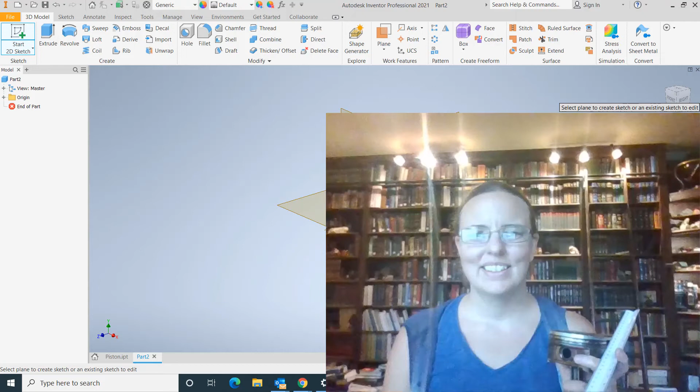Hello! So exciting, we are now starting our engine project. And the very generous people at Kingwood High School have donated some parts for us.

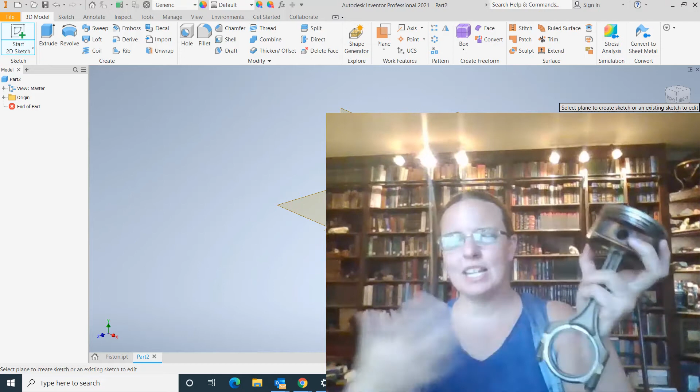So what I have here is the connecting rod, wrist pin, and piston off of an Acura. Now, interesting thing, if you think of Acura you might first think Japan. But upon measuring the dimensions of this thing, it lines up with, surprise, inches better than millimeters, which means it's actually made in North America. And I Googled it, and sure enough, Acura is now produced in Ohio.

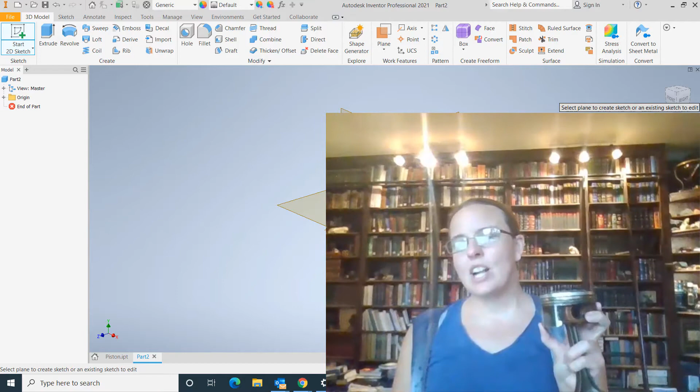We're going to start out with a piston. It looks like a cylinder with some stuff carved out of it. There's actually a little bit more to this than meets the eye. We will talk about the oil control ring, the compression rings, how those valves are going to sit on top of it, the skirt, and how it's going to rub against the walls.

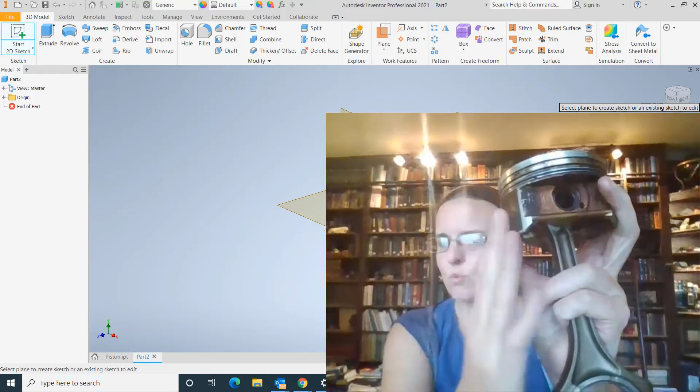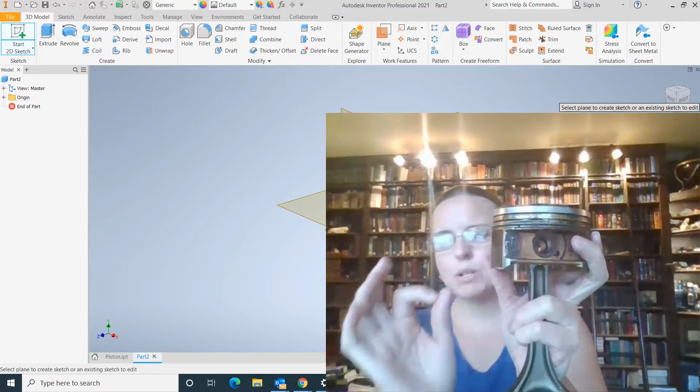This is actually not a straight cylinder. All of the combustion happens at the top, which means the top is really hot and will expand versus the base, which is not quite as hot and does not expand enough. So you have to put in some material thermal properties in determining the dimensions of this thing. It's going to be using a tapered extrude for that point. And hopefully this will be kind of an interesting introduction to engines and how engines work. I'm super excited to have some actual parts to take dimensions off of this year.

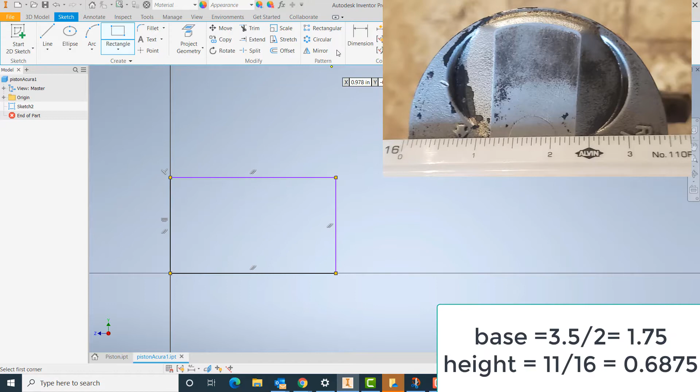Zooming in on this, we have a diameter of 3.5 inches, or radius of 1.75. I'm actually going to just make a quarter of this and revolve it around the center. So we'll have a rectangle 1.75 and a height of 11/16.

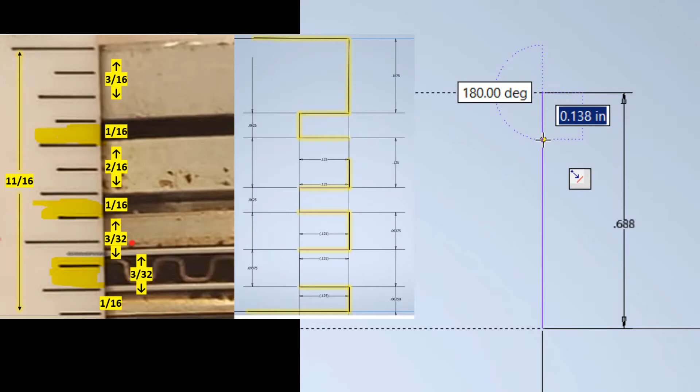And you can actually put these things in as a fraction, those three significant figures showing up. The fourth significant figure, it's 11/16 high. 3 divided by 16th for this top lid, going back 1/8 of an inch.

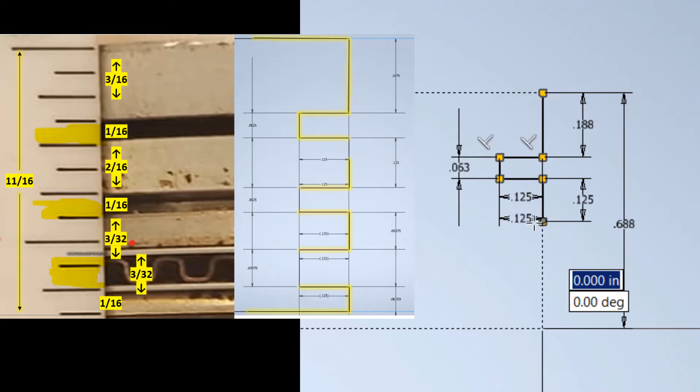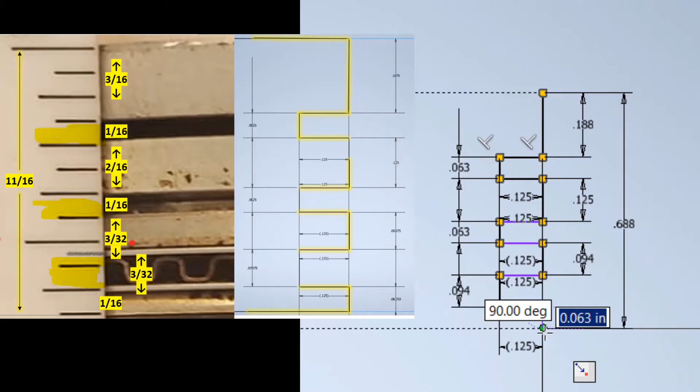0.125 inches. And then we're going to come down 1 divided by 16, back over 1/8, 0.125, down 2 divided by 16, over 1/8, down 1 divided by 16, over 1/8, down 3/32, or 1.5 over 16, over 1/8, and down another 3/32, or 1.5 over 16, over 1/8, and that should bring us 1 divided by 16 back to our base.

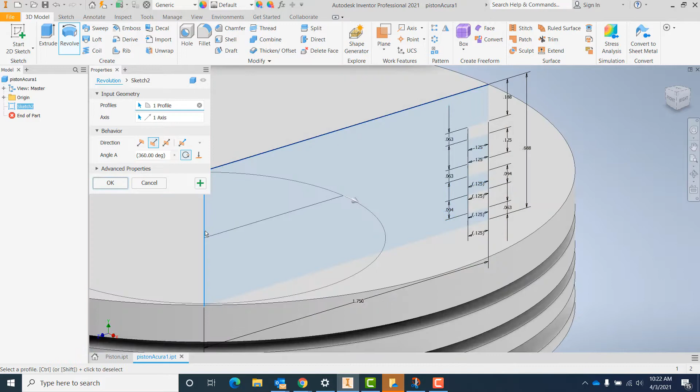So completing this top portion, turning these back into regular lines, finish sketch, and we're going to use the revolve command. Select our area, and the axis is this left side of the rectangle, 360 degree revolution, and there you have the top.

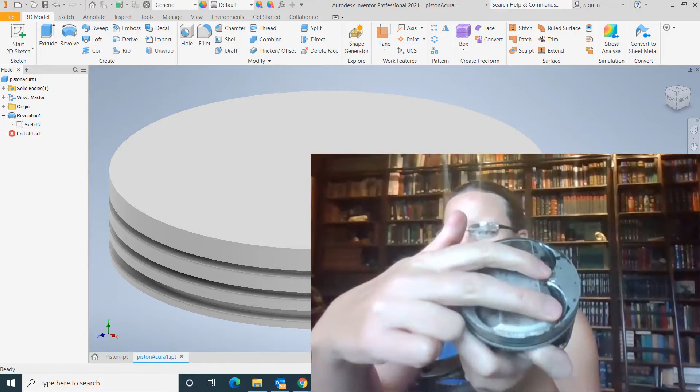Just a few notes about the crown of this thing. So the combustion area happens right above the piston, and in here you can see the valve recesses. So we've got the intake valve where the air and sometimes fuel is sucked in. Sometimes the fuel goes directly to the combustion chamber. And then there's another 2 valves where the exhaust is then pushed out after the combustion happens.

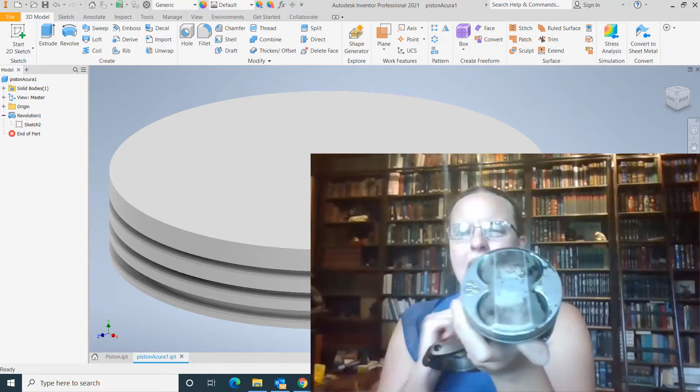Some interesting carbon buildup on this that indicates that there was a little bit of oil leaking out of those valves that then burnt on the top of this. You can check your seals and some of the engine performance by looking at carbon buildup in here.

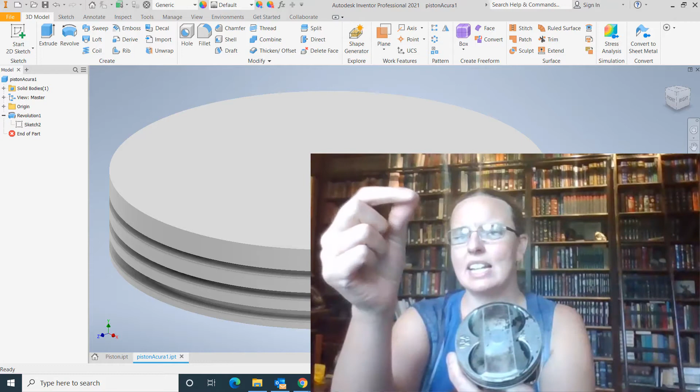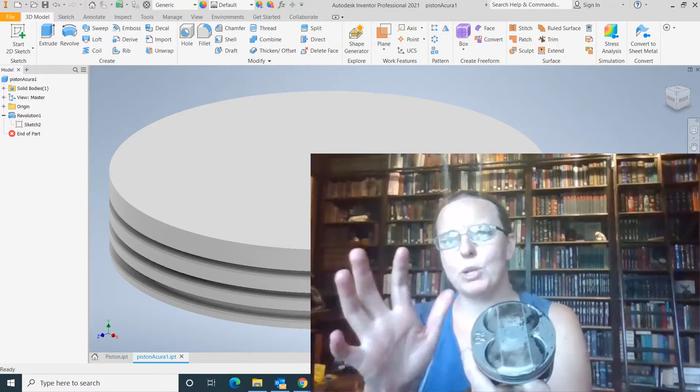Gasoline is actually a solvent. When you used to add gas to the valves themselves, the gas would clean the valves, but now you want to really cut back on the amount of gas you're using and get fuel efficiency. So the new injectors that go straight into the combustion chamber themselves don't clean the valves out as well, and you can get some carbon buildup on the intake side. The exhaust side, at this point, you have very high temperature gases, and just the high temperature will usually burn off and keep those valves clean all on their own.

Rather than putting these guys in now, I'd like to kind of build the rest of the engine, see how those valves are going to set on the top of this thing before actually placing.

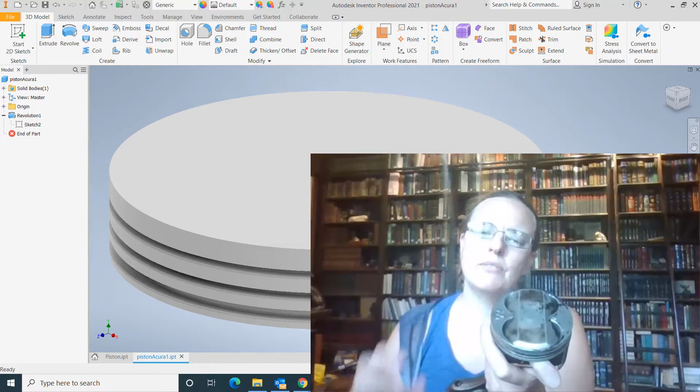The volume of the combustion chamber is actually really important. If you get a very small volume, you'll get a higher efficiency. So you have the top dead center, bottom dead center. Small area, small volume means high pressure, that you're compressing those gases into a very, very small area up here. The smaller the area, the higher the pressure you will get.

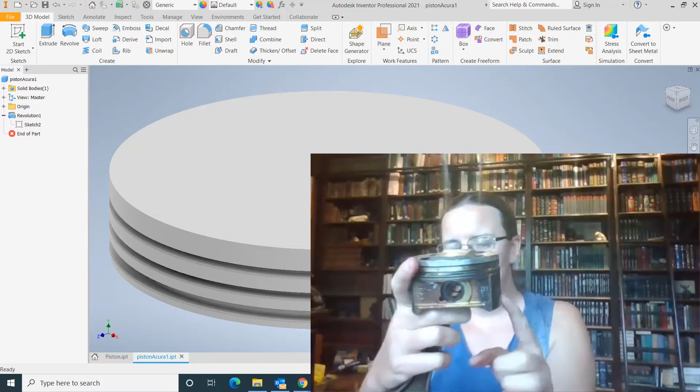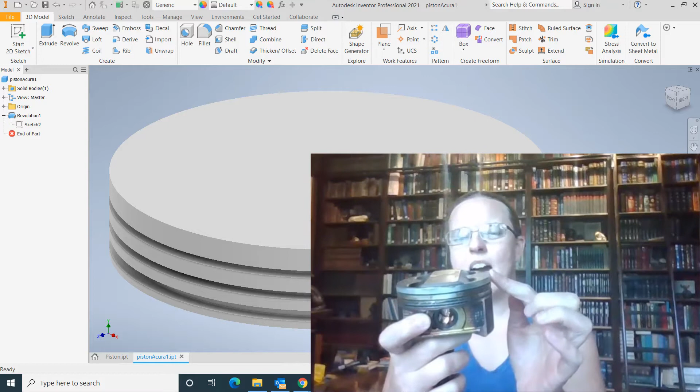Going on to the skirt of this: high temperature, not quite as high temperature. Because metal expands when it's hot, the top of this will expand more than the skirt will expand. So there's actually a little bit of a taper on this where the base is larger than the top, because the top, when it gets hot, will expand out a little bit. It is also not circular around this, and that is how the force is.

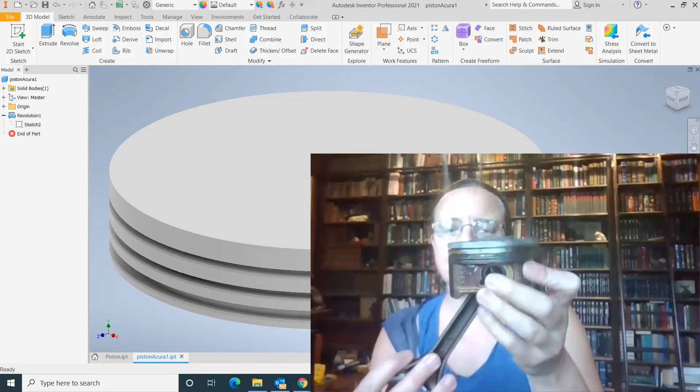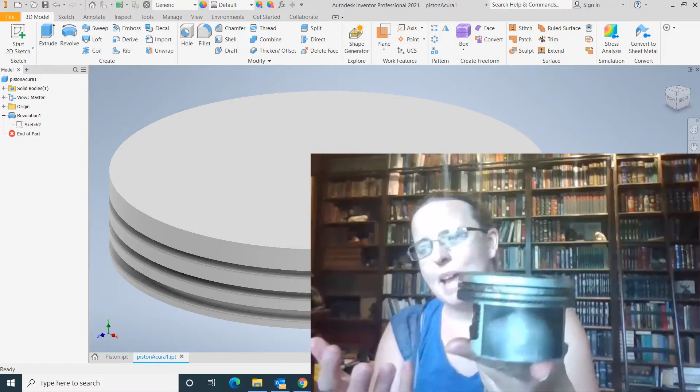During the power stroke, you light the fuel on fire and have high pressure that shoves this thing down, turning your crankshaft, with all the force transmitted along your connecting rod. So this thing is actually pushing into the side of your cylinder, not around the entire thing. It pushes on one side in particular, and you can see how the piston is worn down, clockwise versus counterclockwise, giving you a major and minor axis of which side it's really rubbing against. So you can put a bulge on the side that's pushing against that cylinder.

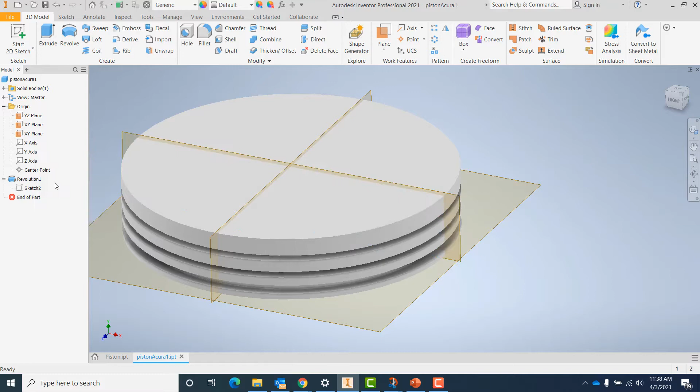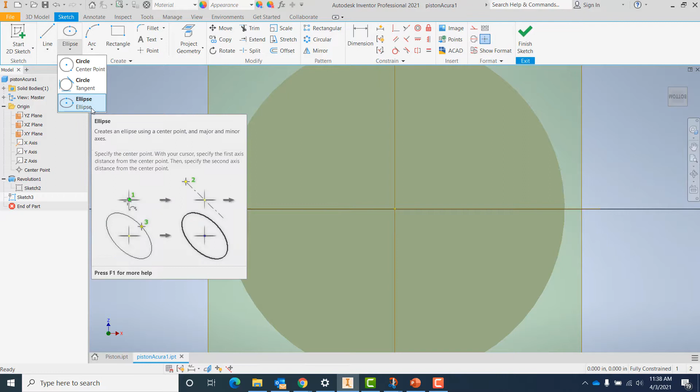Before adding on the skirt, I'm going to make all of these axis planes visible. We'll choose the x-axis to be the thrust axis, or the long side of our ellipse, and 90 degrees to that will be where our wrist pin will go. So opening up the ellipse, we click on the center, then on the long side of the ellipse, and then on the shorter side of the ellipse.

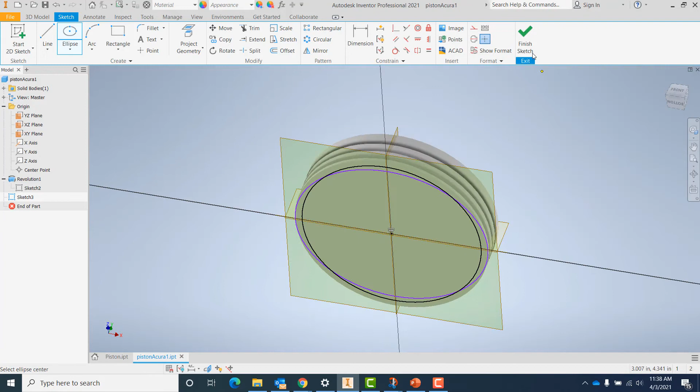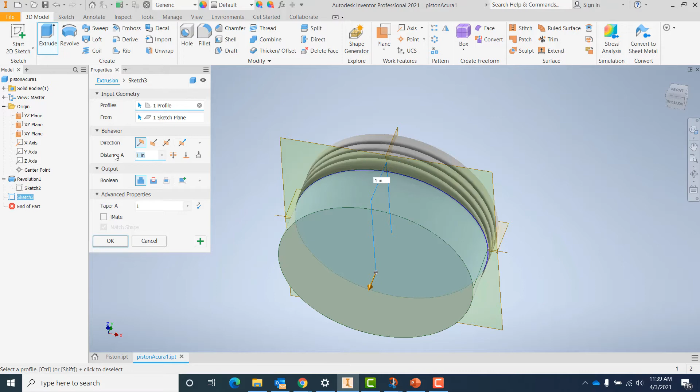If we really wanted to get technical on this, we'd look at the expansion and forces, but I'm just going to put this in as a point that it's an ellipse for the skirt. Extruding this down, in the advanced properties you can put a taper angle on this extrude. This will be very slight for the piston, like 1 degree, but here's 10 degrees so you can see which way it's slanting. The bottom is larger than the top because the bottom is colder and won't expand as much in the engine.

I'm going to extrude this down 11/16 of an inch. The entire piston was 2 inches high, so if I subtract that 11/16 from 2, this is where the height of this thing will end up.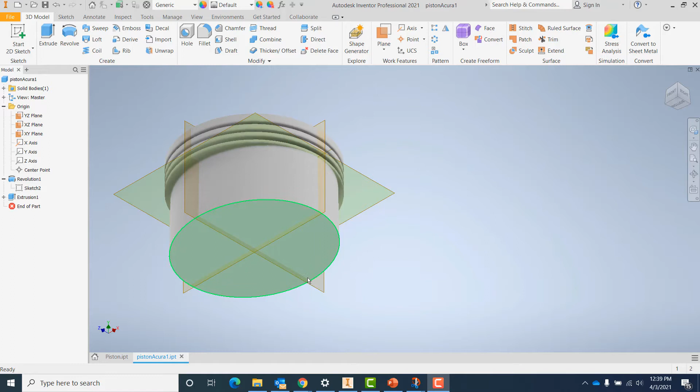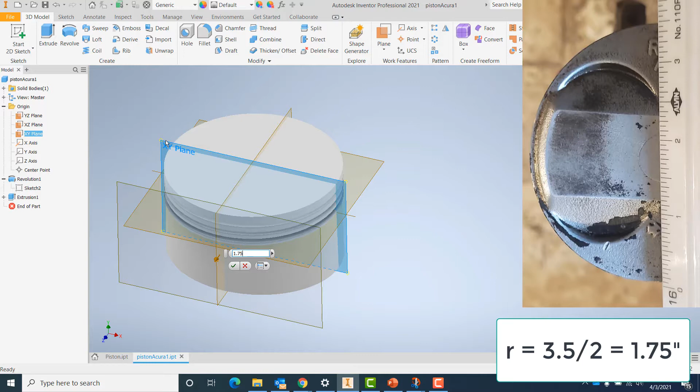The wrist pin is going to be traveling along the shorter side of the ellipse. So what I'll do is create a new working plane that's offset from our centered plane. If you remember, the diameter was 3.5, meaning the radius was 1.75. I'll bump that new plane off to the side by 1.75, and then draw in where that wrist pin is.

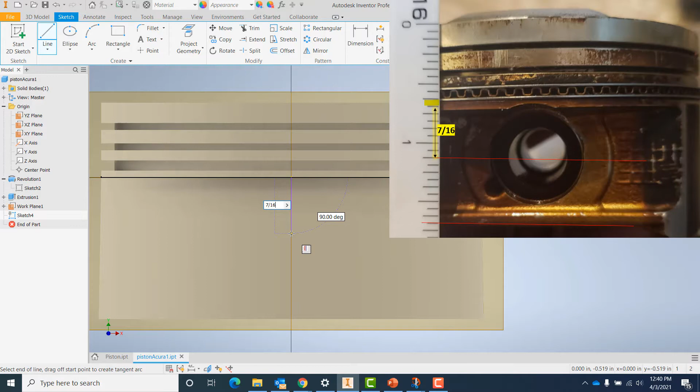Starting up a new sketch, I'll bring this down with a construction line from the base. The center of that hole is 7/16 of an inch from the base of that cap. Going to a circle, turning off the construction line, the diameter of the wrist pin is 7/8 of an inch.

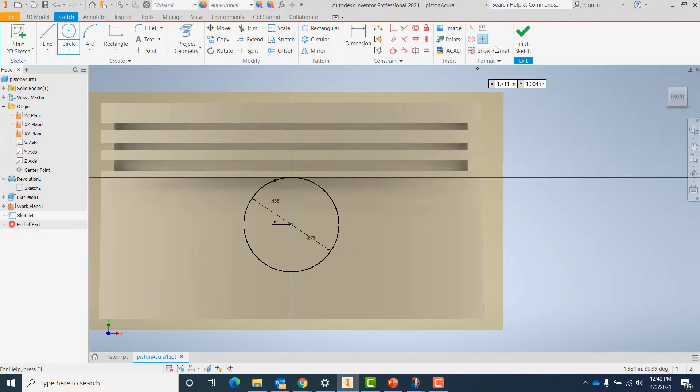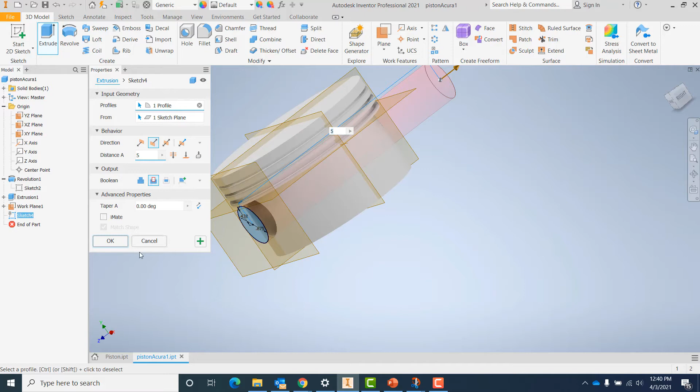Finishing out that sketch, I'll push it through the entire piston. I'm going to overshoot that to make sure it makes it all the way through to the other side, and turn it into a cutout. Okay, and there is our wrist pin hole.

Carving out the base of the skirt using the same working plane, I'm going to project geometry to get the bottom edge to pop up. The base of this is 2.5 inches, or half of that is 1.25 inches, and then up 5/16. I'll then draw another line for the other side of this to create this box, 1.25 inches, making sure everything is centered and straight horizontal.

And I'll go ahead and draw the rest of this box. I'm going to use lines, so I'm sure not to draw two lines over another. This will let me draw the lengths of these to line up with what's already there. Hitting escape and then turning everything into solid lines.

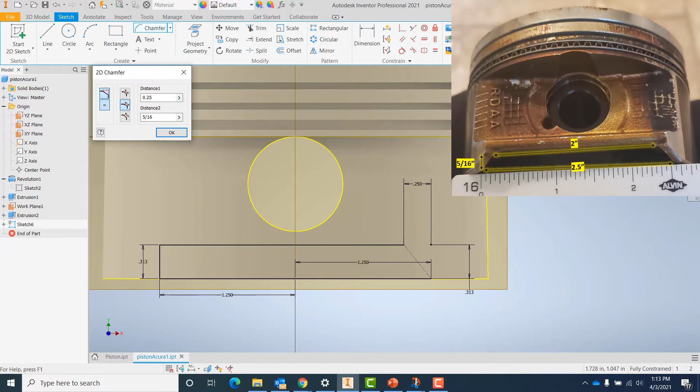The final thing to cut off these corners, I'm going to use a chamfer edge. The top is 0.25 and the side is 5/16. Distance 1 is the first line you click on, distance 2 is the second line you click on. So again, chamfer edge, 0.25, 5/16 — click on the first line for the first distance, and the second line will apply that second distance. Finish sketch.

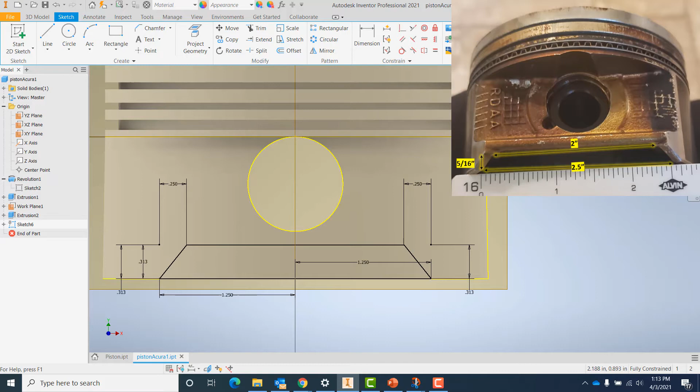Make sure that we have all solid lines in here before we move ahead. I'm going to extrude this out just like the wrist pin hole, making it a cut, and there we've gotten rid of some of the weight on the piston, making it a little bit more energy efficient.

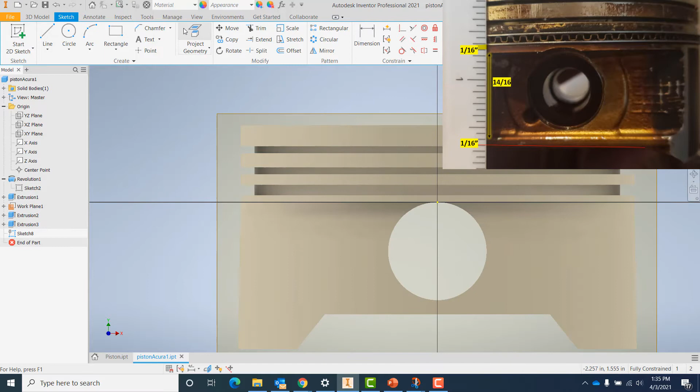The next piece is carving out the wrist pin boss. This is going to be a rectangle that's going to push into the side of our ellipse.

We're going to start this rectangle 1/16 of an inch underneath that top extrusion. It'll go down 14/16 of an inch, giving 1/16 on both the top and bottom of this.

Go ahead and use some construction lines, making sure those are oriented at exactly 90 degrees, straight up and down. Remember, the side of our ellipse is not straight up and down - this was a tapered extrude with 1 degree difference from top to bottom. So it's not a good idea to grab this at just the side.

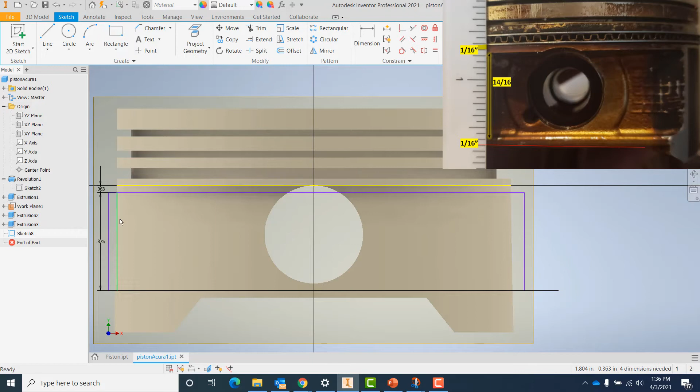I'm going to overlap it. The important part here is the 14/16, the height of the rectangle. I'm just going to smush the whole thing into the side of the ellipse - overlapping the edge, making it longer than it needs to be, and pushing it in 1/2 inch here.

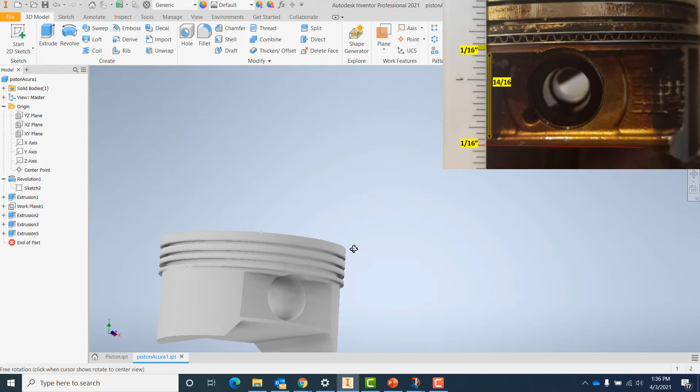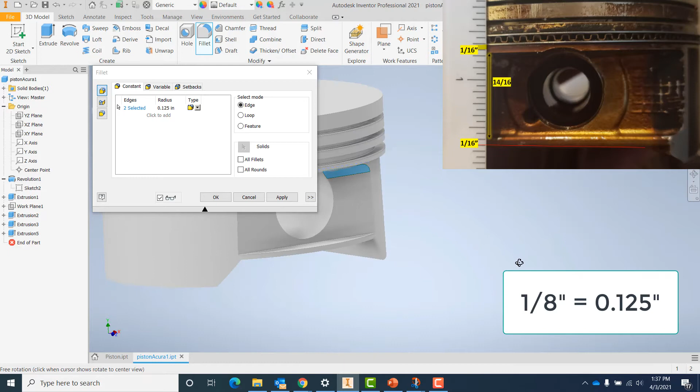Looking at this thing when it's done, that bottom lip looks pretty thin and fragile, and if you look at the piston itself, I'm going to use a fillet edge. This is just an artifact of the manufacturing process for these - you're not going to get sharp edges down here, you don't need them on the base. So here's a fillet edge, 0.125 inches, just 1/8 of an inch radius.

That will make it a bit stronger around where that wrist pin is going to go. This was on each side of the piston, so rather than redrawing it, let's go ahead and find that center plane.

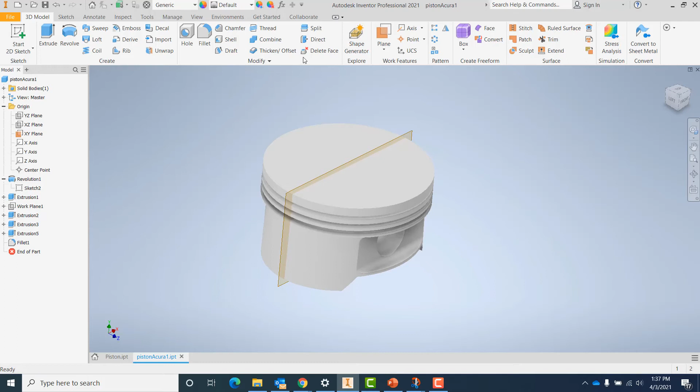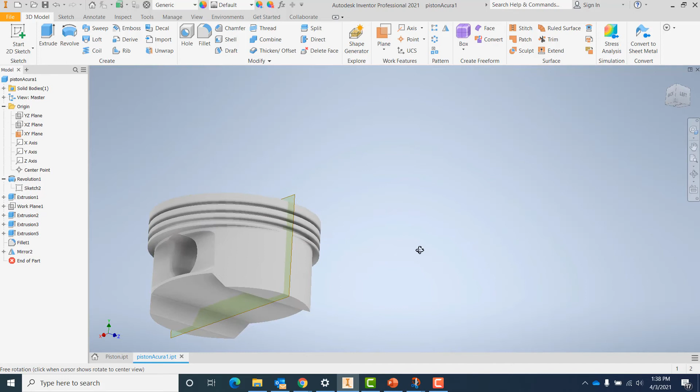Make that visible, and we can use the mirror command on this. Opening up the mirror command, you can select multiple features right off the left-hand side of your screen here, and I'm going to use that center plane for the mirror plane. Now we have the same cutout on each side of our piston.

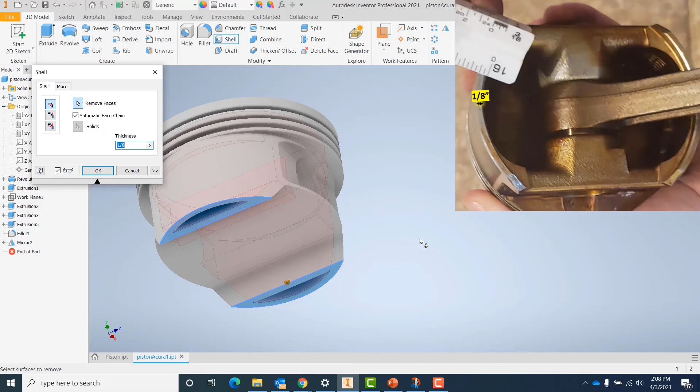For this next piece, we're going to use the shell command. The piston is not solid, and the thickness of the wall looks like 1/8 of an inch. I'm also going to remove some faces on this, which will alleviate work in the future.

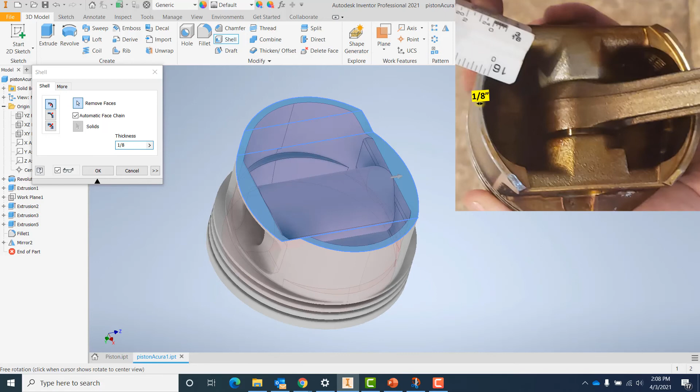Holding down my shift key and pushing on the scroll button allows me to rotate - you can rotate while in the middle of one of these editing commands. So this is what we're after: shell 1/8 of an inch thick, and we're going to remove all of those base faces before hitting OK.

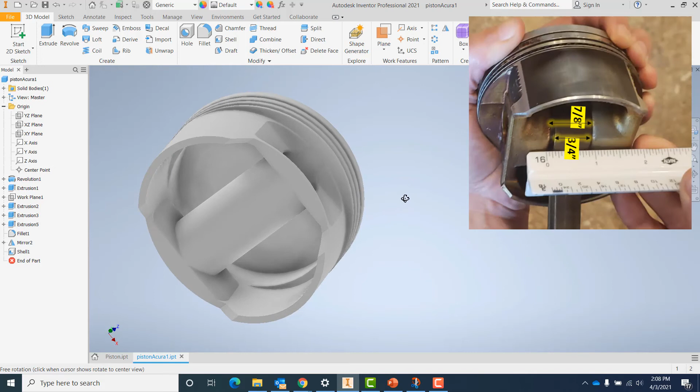One more thing - we need to make room for the connecting rod to fit up inside of here and be connected through the wrist pin. So I'm going to start a sketch on this base plate, and figure out how far away from the center we're going to be. It's 7/8 of an inch total, or 7 divided by 16 for half of that.

And we need to carve out a rectangle. Again, I'm going to kind of overshoot this because the width of it is what's important. So coming over 7 divided by 16, which is half of 7/8, I'm going to overshoot my rectangle, just making sure that we'll end up with 7/8 at the end of this.

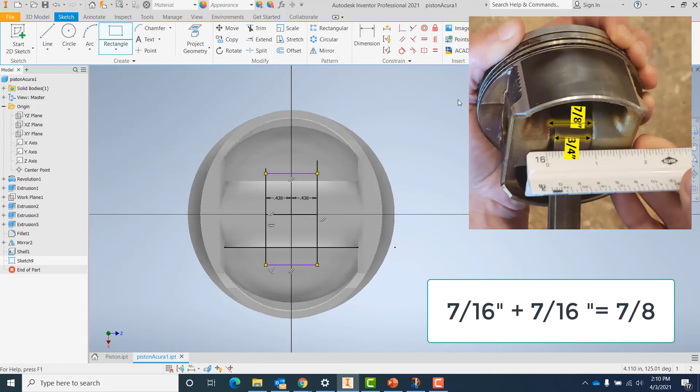I'll go ahead and get rid of those initial lines, making sure I have just a rectangle to extrude here. And we'll push this up all the way through - let's see, so it had a height of 2.

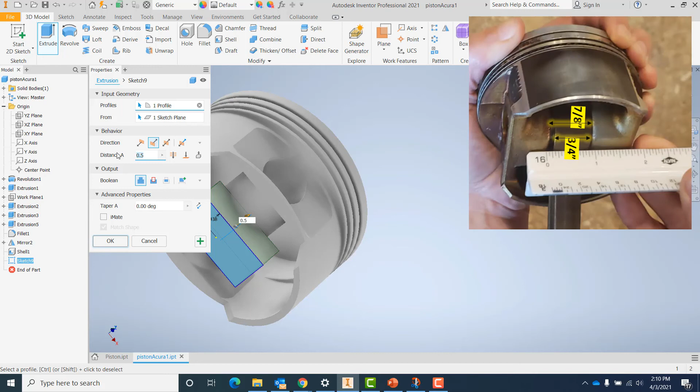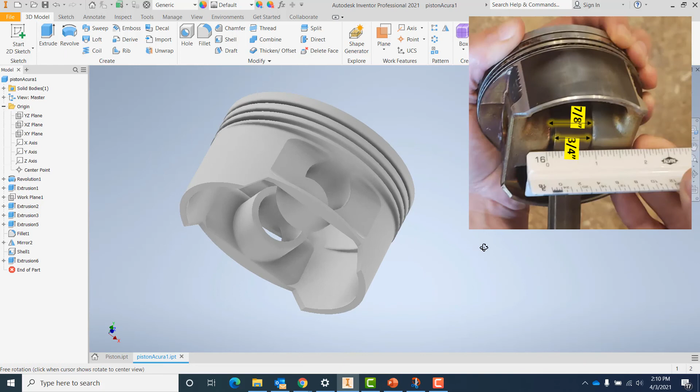I'm going to go up a height of 1.75, so that's not punching through the top of this thing - it should be 1/8 thick through the top. And I'll turn this into a cutout. That is where our connecting rod will come up into the inside of this piston and connect with our wrist pin.

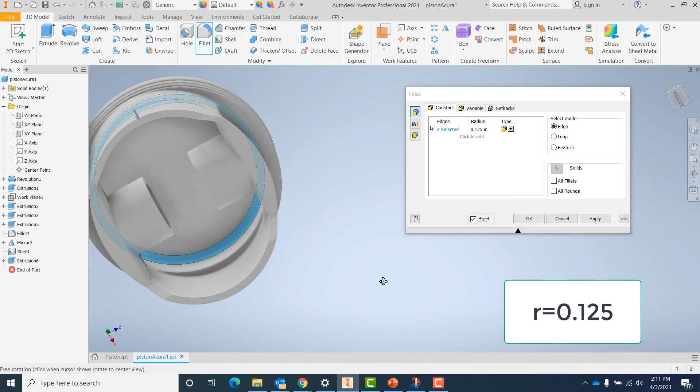The last thing is to walk around and add some fillets to all of those sharp corners on the inside, and this is just going to give the piston some strength. There's a very large force - you're moving a 3,000 to 5,000 pound car around with this little thing, and the entire force comes through this piston. So we want it to be lightweight and energy efficient.

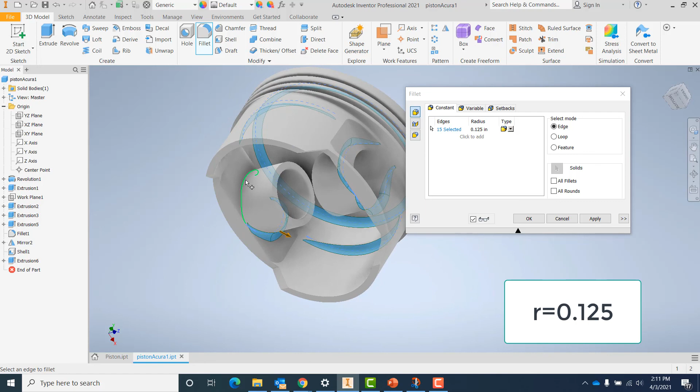So some of these engines are made out of aluminum now, they used to be out of steel. Lightweight makes a big difference, but we don't want it - a lot of times it'll start cracking at any sharp edges. Okay, and that should finish out our piston design. So pretty neat.

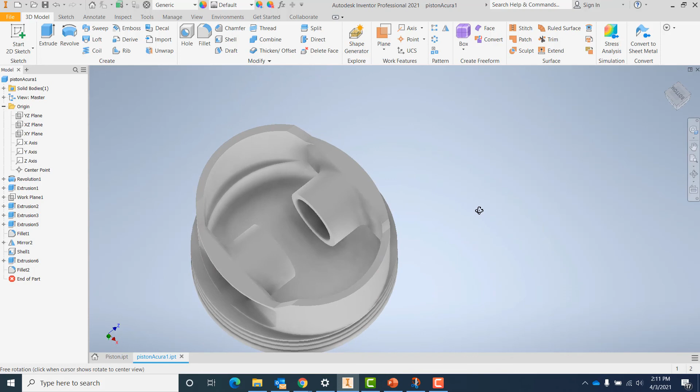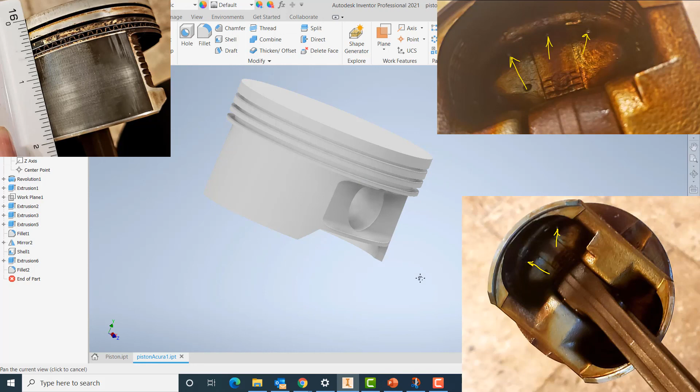A couple more things you could add into here are some little holes where the oil can make it through. So you have the oil control ring, this third ring down here, and there would be a hole drilled through the side for the oil to come through. Make sure there's a little bit of room for the oil to come into this wrist pin. So a couple little oil holes, but other than that, we're done.